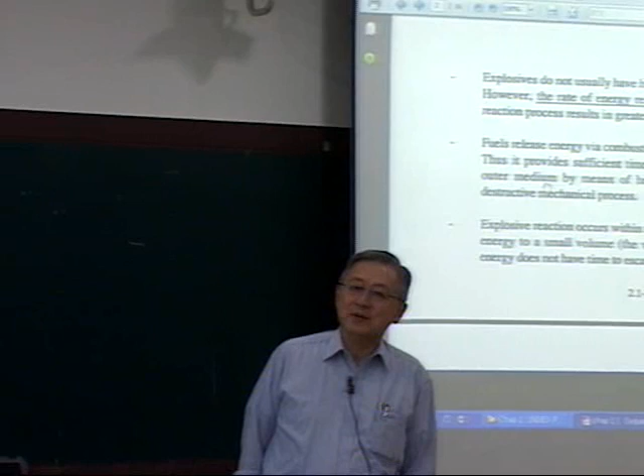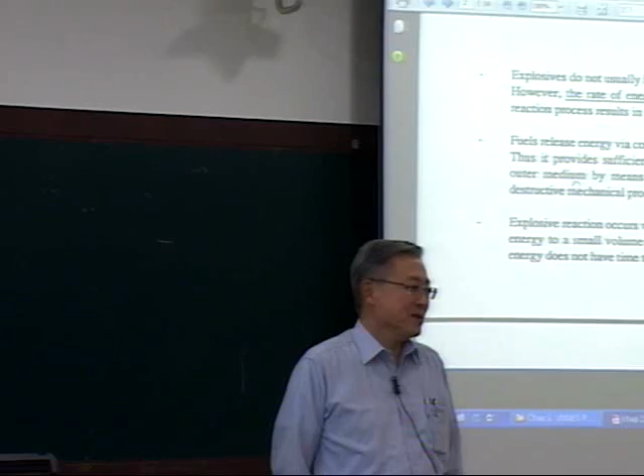Okay, so it looks like you have a great time, because it's a beautiful blue sky up there, and now really fall came in suddenly. Two weeks ago it was hot; for the last two to three months of summer it was really hot. We never experienced such a hot summer anywhere in the US or in Korea, but it was hot, right? So now everything cooled down, so it's really time for what? Time for studying hard. Then you can really have some great mileage. As you study hard and really concentrate, you will also have a great time.

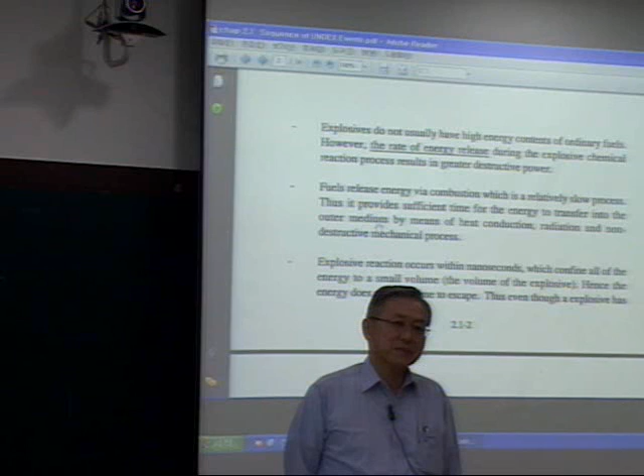And next week is of course Chuseok, and as you notice, I didn't really assign any homework, but I mentioned to you a couple of times, think about your term project. Think is most important. Think, and take time to look at yourself; what you're doing is very, very important. I always mention to my lab students, if you aren't careful, you will just keep moving and keep moving without knowing what direction you are heading, and without knowing what's out there.

That's very dangerous, okay? That doesn't mean don't go too fast, sit back, relax, watch TV. No, it's not. Once in a while, I want you to sit back and check where you are, what you're doing, and what direction you are going. That's a very good measure, okay? And not only concentrate on studying your major field, but also sit back and read other materials which you really enjoy. Just take your mind away from your major field, spend a little bit of time, then come back, okay?

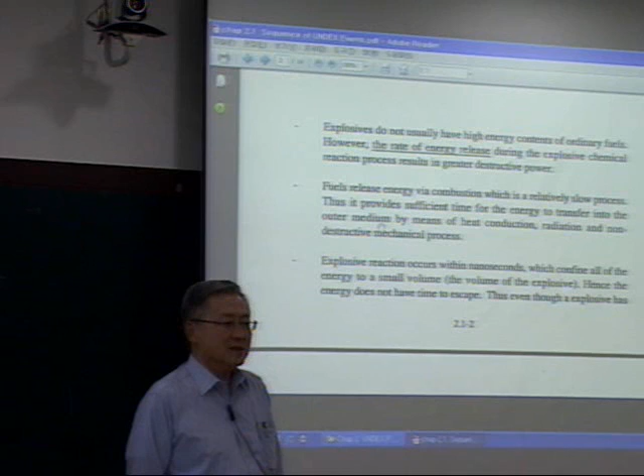So this is kind of the second week, and today I'd like to finish chapter 2.1. That's just the beginning, but through this introduction, get a feel for explosions. So that's kind of important. And Friday, as time permits, I'll check with my student, Dongman, about the U571 movie clip. Then I'll show you some real underwater explosion phenomena. With your basic, very small knowledge, you should be able to identify what the explosion in the water is, okay? So that will conclude the introduction, which is 2.1.

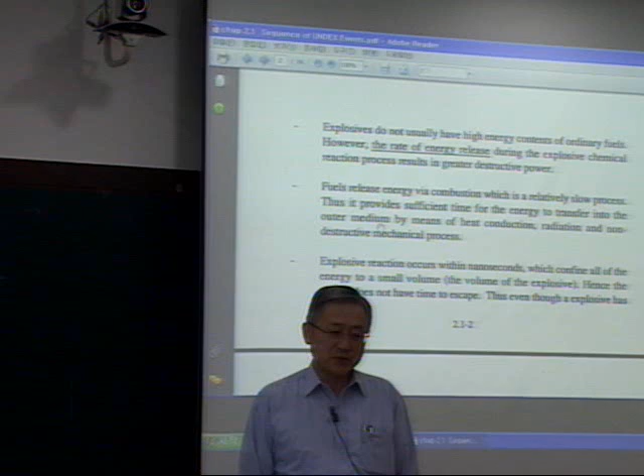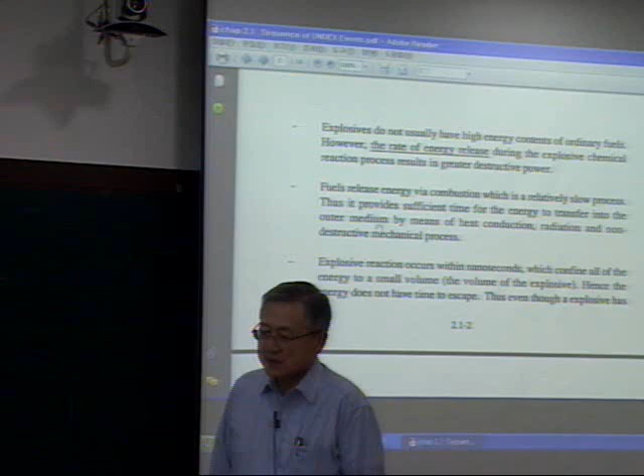Then after you come back from Chuseok, we'll do 2.2, which is conservation law, which I'm pretty sure you learned when you took something like intermediate fluid mechanics or beginning fluid dynamics, because that's the whole basis of ship shock analysis. It's hiding a little bit behind it, but with conservation law you can solve many classes of underwater shock problems. So that's what we're going to learn. That's the direction we're moving in.

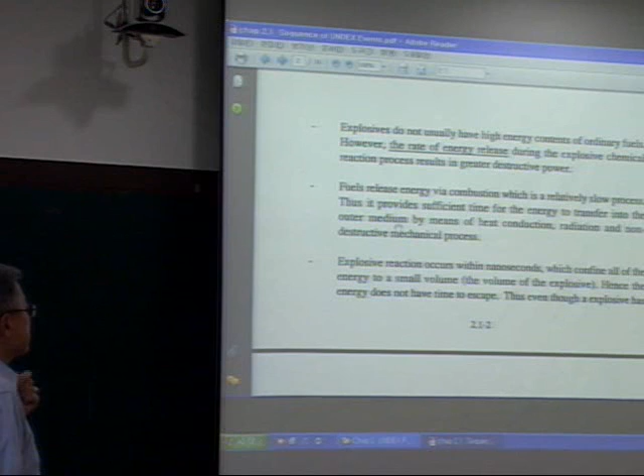So this is a continuation of Monday's talk. As you see, there are a lot of bullet items. Don't overlook them; I want you to read them. I'm going to spend a little bit of time with you today, then get your feel on it. Explosives do not usually have the high energy content of ordinary fuel. What does it mean? It says they do not have the high energy content of ordinary fuel. The explosion is rather concentrated to what? Hassan, to what? Power.

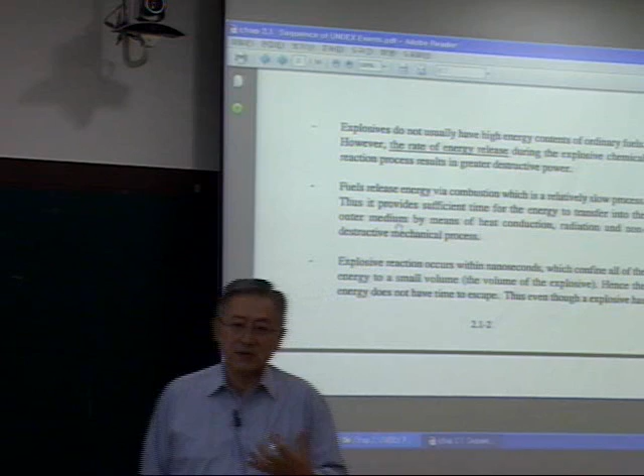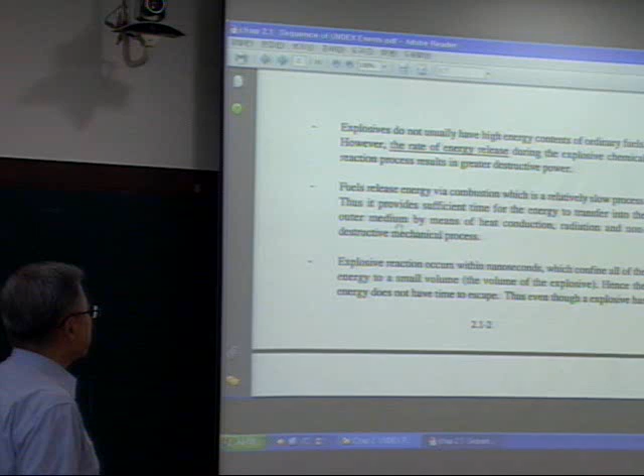So fuel itself is connected directly to energy, but explosion is connected to power itself. Power is the time rate change of energy. It says rate of energy release, time rate change of energy, right? So that's power. The explosive chemical reaction process results in great destructive power. Fuel releases energy via combustion, which is burning, a relatively slow process. The burning speed is of course a function of the pressure, but it happens below the acoustic speed, the water acoustic speed if it happens in water, the air acoustic speed if it's happening in air.

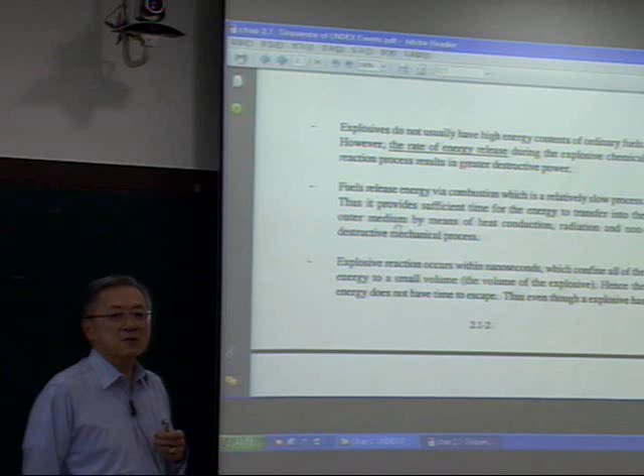What's the air acoustic speed? What's the value? 300. What's the water? 1500 meters per second. So divide by about 4.5, then you get the acoustic speed in air. So fuel releases energy via combustion, by burning, which is a relatively very slow process. It provides sufficient time for the energy to transfer into the outer medium by means of heat conduction, radiation, and non-destructive mechanical processes.

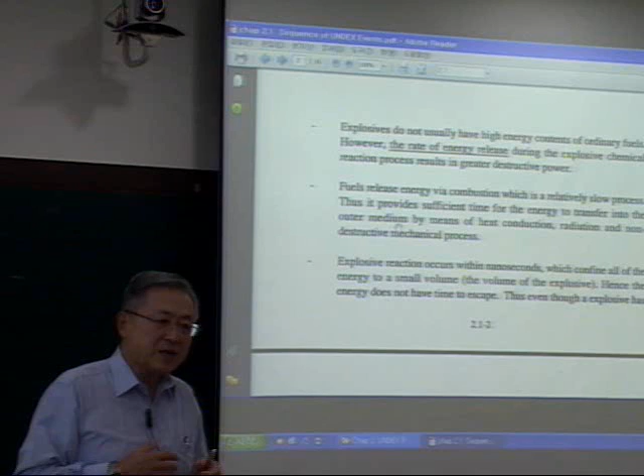However, when you confine the volume, then what happens? Then it generates more power release, like a bullet, as I mentioned. The gunpowder burns, confined in a small canister, and it just pushes the bullet out. So when you confine the volume, it generates higher power. The energy is due to the burning.

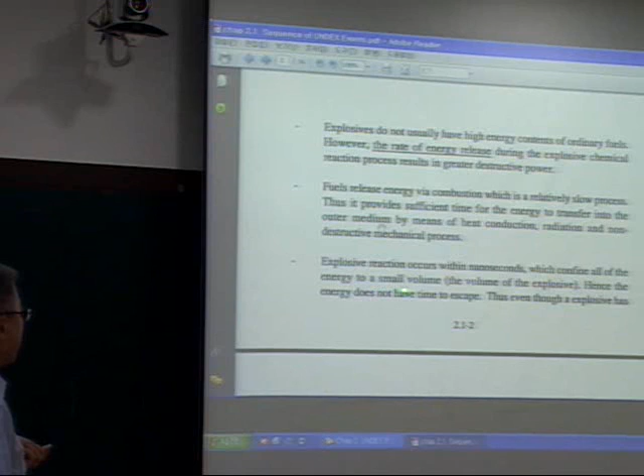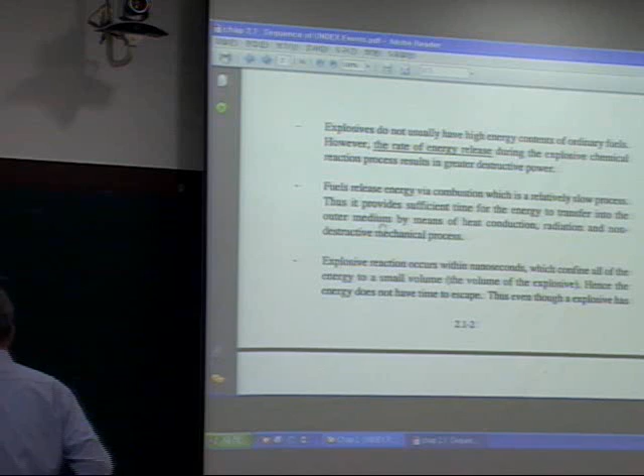For an explosive, the reaction occurs within a nanosecond, which confines all of the energy to a small volume, the volume of the explosive. Hence, the energy does not have time to escape. Thus, even though an explosive has less energy to release than the fuel, it releases it so fast that the energy contained in the given volume is extremely large. That's the reason an explosive is so destructive.

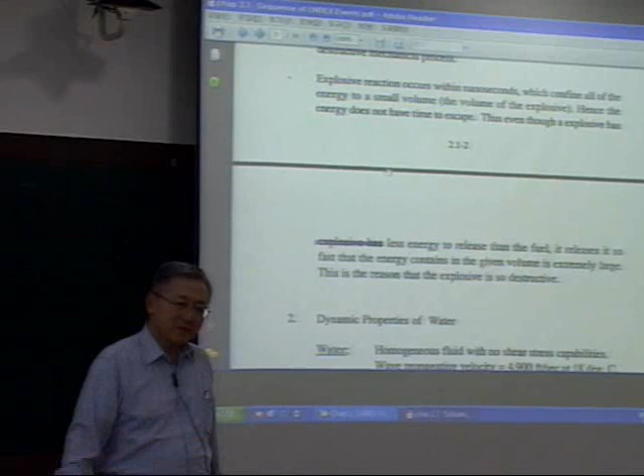When I say it happened in a nanosecond, all these kinds of talks I'm doing, when you need a judgment by looking at the data you analyzed or acquired through testing, you should develop the kind of sense to make a right decision whether the data is good or bad. Sometimes you are busy calculating a simulation, for example the explosion result, and until maybe the end of the semester you don't really have decision power whether that data is correct or not. So every little thing is built up.

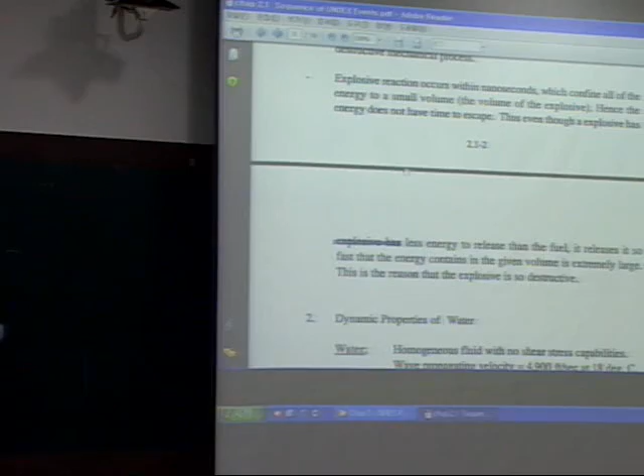So here, this is time t, and this is pressure. For example, the explosion occurs right here. Then this is a target in the water, whatever. At the time of explosion, the shock wave will propagate and hit the target. As I sit here, I feel the shock pressure coming at me and passing by. So if I draw, no longer like this, I'm going to start from here, then move up, then draw like that.

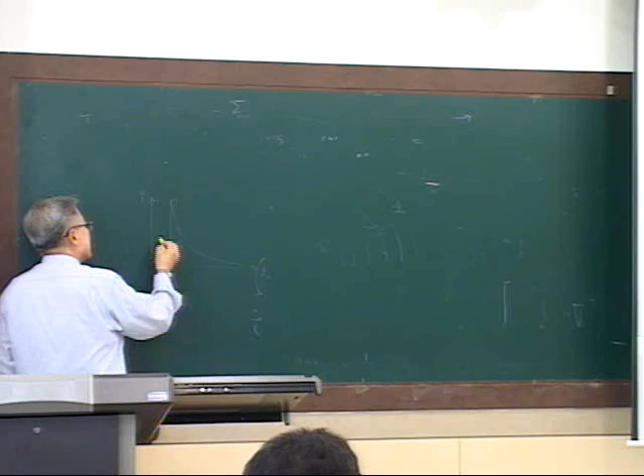So what would this pressure be? Anybody? Before I draw the pressure versus time, this is not very good chalk. Before, I drew like this, did I? Don't watch me like that. That's what I did. Then nobody asked why it starts from 0.

Now I draw the pressure profile, pressure time history, like this. My question is, what's this? This is non-zero. 0 is here. This is non-zero pressure. I said that this is the explosive, this is the target, then the water surface could be way up there. What would that pressure be? Water pressure? Water depth. So this is a pressure, let's say P naught. So P naught looks like a static pressure, right?

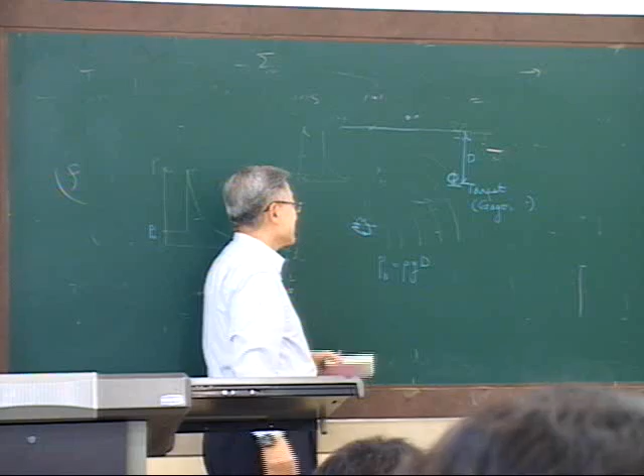This is the explosive, right? And the target is here. So gauge or target; sometimes you say gauge or target. And this is the depth D. That's our point of interest, right? So that's rho G D. And the other pressure is atmospheric pressure, 1 bar, PA. So P naught here is PH plus the atmospheric pressure. So this is what P naught is.

Everything's all calm, so quiet. When you ride a big cruise ship, it's not that quiet. But on a naval ship, I rode the aircraft carrier for a week, I rode the frigate for a week, when the ship is out on the horizon, everything's so quiet, nothing happens. That pressure is what this point will experience.

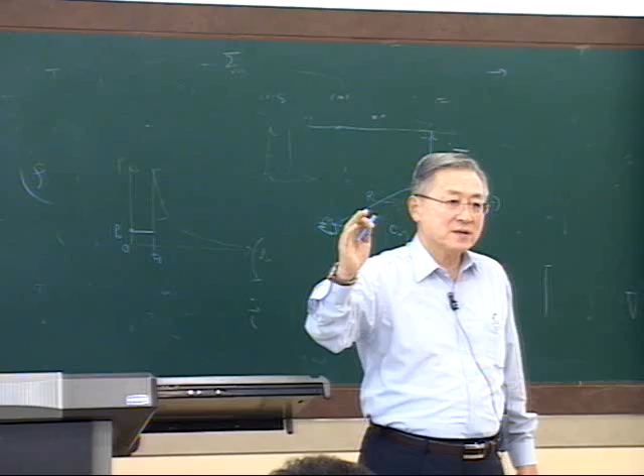Then what happens? When the explosion occurs, bang! A sudden pressure rise up there. And you can even calculate this time, let's say T1 from 0. How? If from here to here is a distance r, and the acoustic velocity in the water is C naught, then you can compute the time from the explosion, that's 0 time, as the shock wave moves and hits the target. That time, let's call T1, you can compute as we did before. T1 is equal to what?

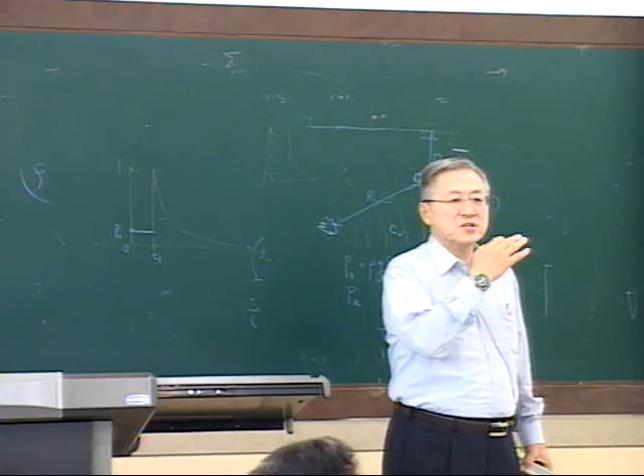R over C naught? So you can compute that, T1. Then the shock wave will move with the speed of C naught. C naught, don't confuse, nothing to confuse. You can use, in the naval ship shock analysis and design course, the acoustic velocity in the water. At the beginning, at the time of explosion, you can use a detonation speed, which is something like 8,000 meters per second, but it converges into the acoustic speed so fast.

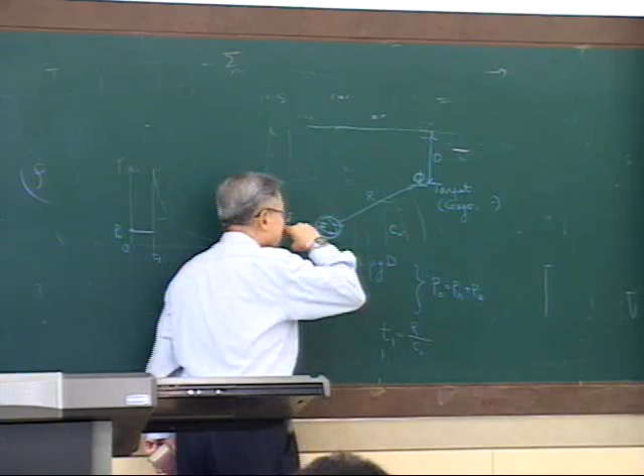So our interest is not in the vicinity of the explosive. I don't have any interest in that. The Navy doesn't have interest in that. Why? This is a ship. I repeat the same thing I told you over and over again. This is the ship, and a small explosive detonates right in the vicinity of the ship, then what happens? It will puncture the hull anyway, right?

If it's a submarine, if the depth charge explodes very next to the submarine, then what happens? It may sink the ship, may not sink the ship. The reason I'm saying is, it's all compartmentalized. It has doors everywhere, right? Sealed, water-sealed doors. When some compartments are flooded, it may not propagate through other compartments, then the loss is there, but not the whole ship, not the whole boat. So you have to pray hard.

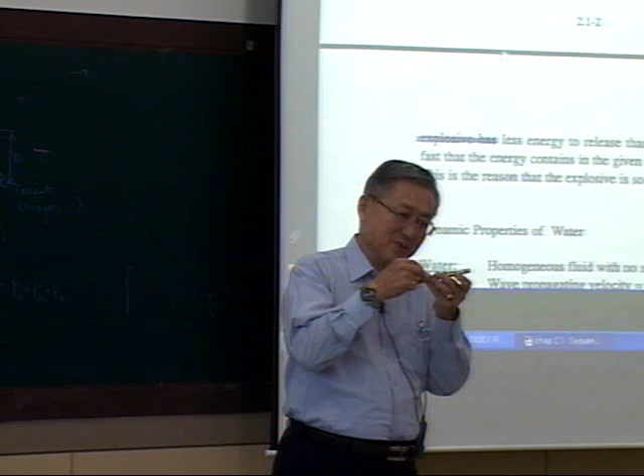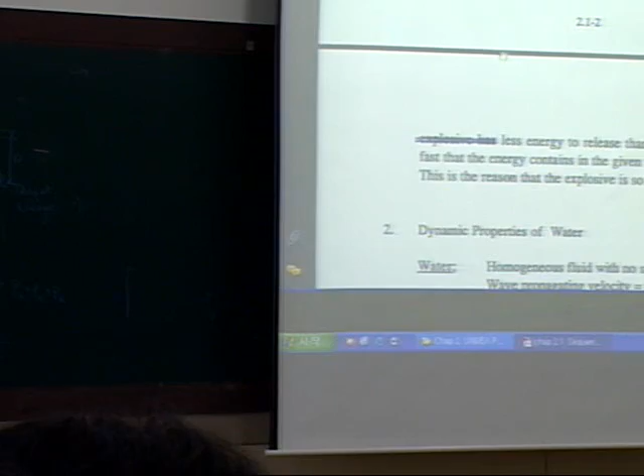An explosion occurs very next to the target. Nothing to prevent. You have to prevent having such a situation. You have to prevent. There is technology around it. So here, well, anyway, I forgot where I stopped. But anyway, so this is the duration the shock wave hits the target. Then now I almost put this really straight up. Then it's a kind of P max.

In my notes, sometimes I use P naught. You have to be careful. I'm using right here, P naught is the static pressure, okay? Then I can draw it straight up, because the explosive shock wave hits the target. Straight up is not exact. Pay attention to this. I said the whole explosion process happens in nanoseconds. When I say nanosecond, that's what I'm trying to explain. This should not be really straight up, but it's a very, very good approximation. If I draw it in a little bit more correct sense, I would rather say this is straight up, a little bit offset. Exaggerated a little bit, okay?

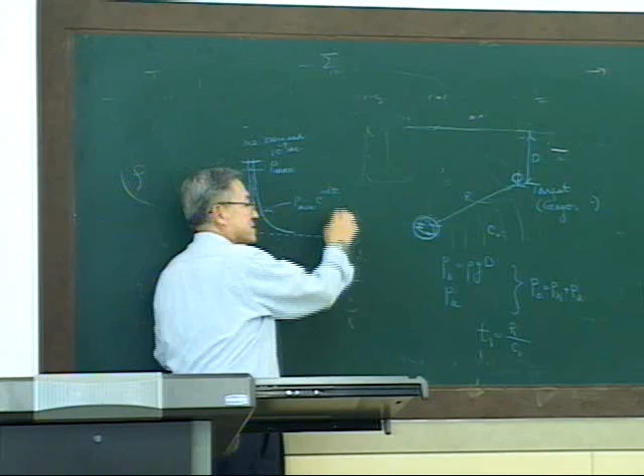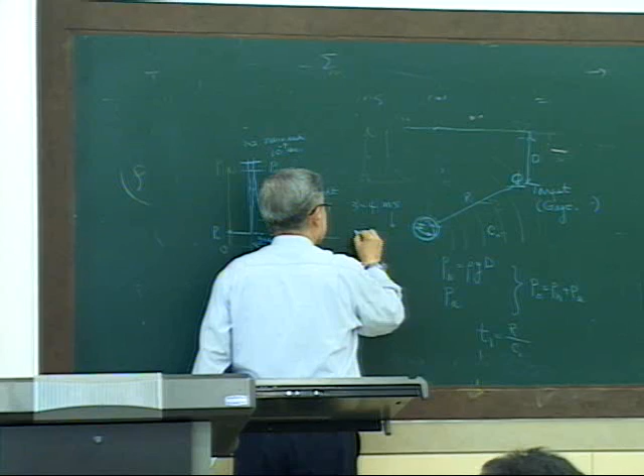Exponential decay means this is P max times e to the minus alpha t. This alpha is some factor, which I'm going to tell you about a little bit later. So it's exponential decay, then it just converges to P naught. This whole process, I could say, is about 3 to 4 milliseconds. A millisecond is 10 to the minus 3, right? So 3 to 4 milliseconds means 3 to 4 multiplied by 10 to the minus 3 seconds. Very, very fast.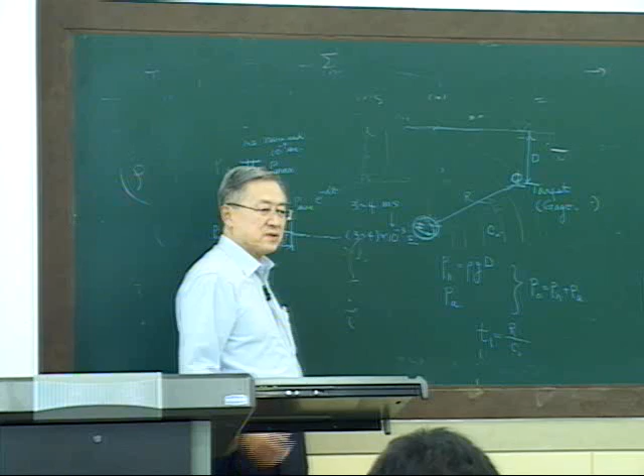In other words, for the explosion, everything is done within 3 or 4 milliseconds. In the Cheonan incident, everything was done in less than around 1 second. Done. So fast. You can't stop it, so fast. So I'm just talking about shock wave propagation. I haven't talked about the gas bubble oscillation. These two items are most important. And some people who claim to be experts in explosions, some, not all, their thought and understanding is not clear. So you have to really, I just mentioned the shock wave propagation here.

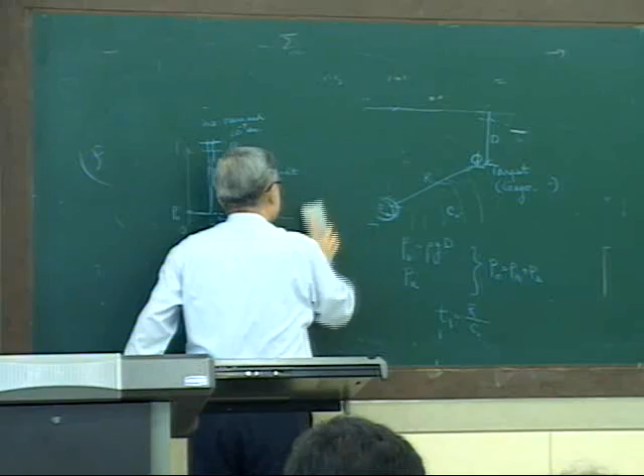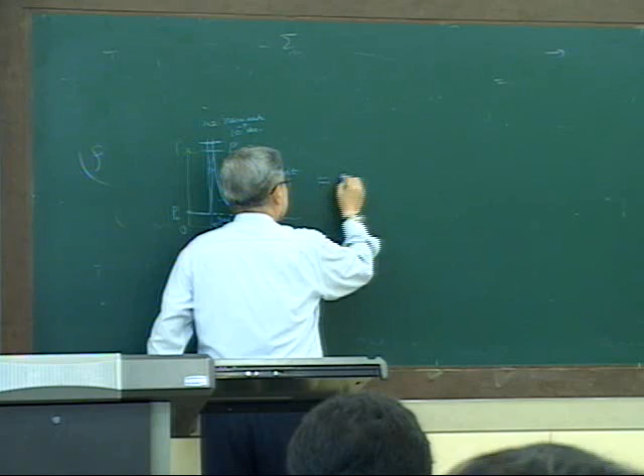And one more. So you have this understanding. Sometimes when you read papers and all that, you're dealing with nanosecond duration. Sometimes you look at millisecond duration. That's the time we are dealing with. And this phenomenon is a combination of two. This is P naught. This is the total P. This is the static pressure.

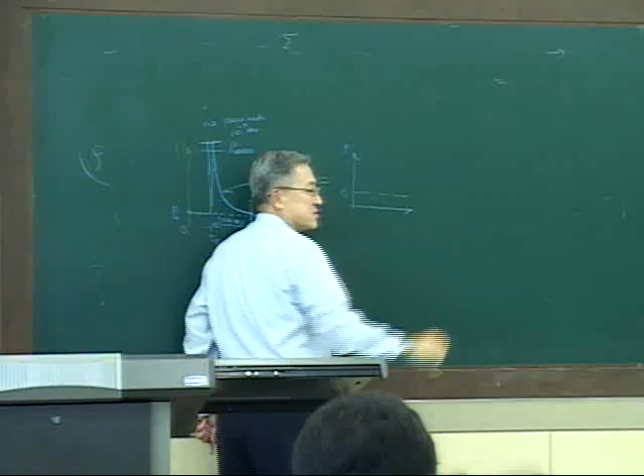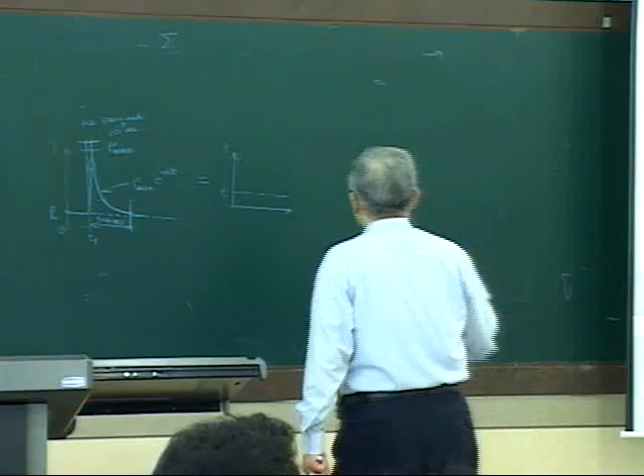You have a structural system, a mechanical system. If it is subjected to the static pressure, then you can compute all the static response, right? Your interest is the dynamic response, right? And for the ship shock situation, you are mostly dealing with a linear system. Linear elastic analysis is what you would involve. And when damage occurs, a permanent set occurs due to the shock wave or explosion, then you are dealing with a nonlinear system. But mostly in ship shock trials, you are dealing with a linear analysis system. You can combine this with this.

It's a combination of two, right? So you can separate static analysis. You know how to handle that. Dynamics you don't know yet; that's what you want to learn. So this P here, this P, is absolute pressure. Total pressure or absolute pressure. Okay, this is absolute pressure.

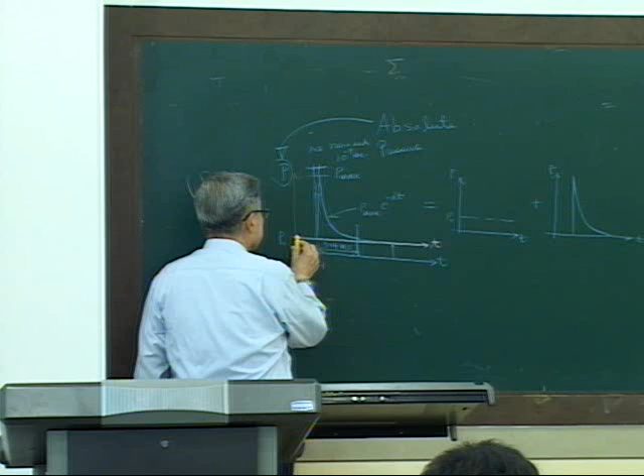But here, if I draw here, over here, this is a 0 here, right? Listen carefully. So this is one way, okay? But here, I'm going to shift my axis from here to here. I'm going to move this axis to here, so I can draw this axis now. This is T. I can do that, right? And also, I can shift this vertical axis to here. Then I can draw this.

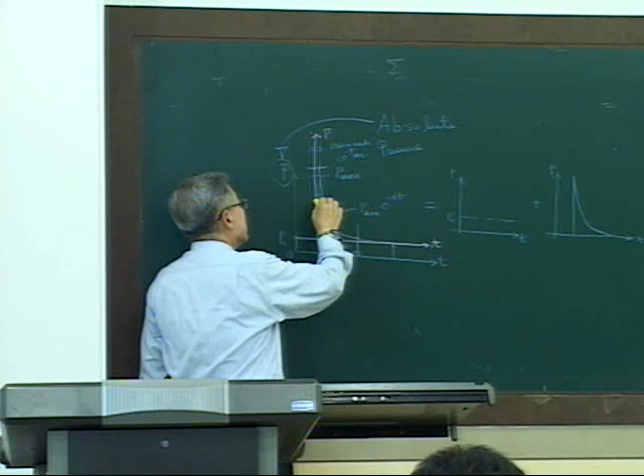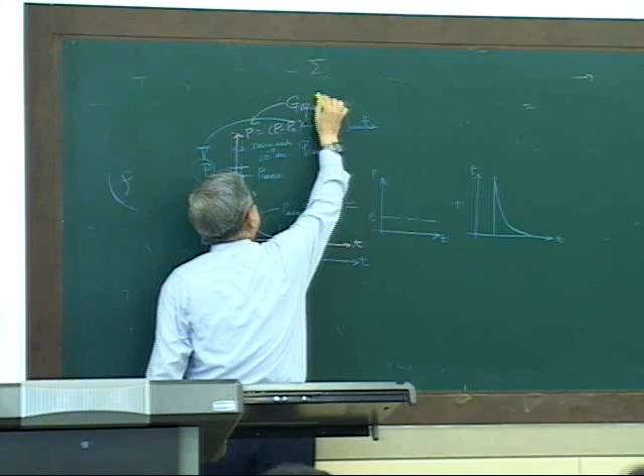Rather than handling this and this, I can just get down to T and P right there. And if you do that, what would be the pressure? This P is really total P minus P naught, right? Because the static pressure is out, just deleted. I have no interest because I can handle that separately. This is called the gauge pressure. This P is gauge pressure. I'll say this again a couple more times, okay? That's gauge pressure.

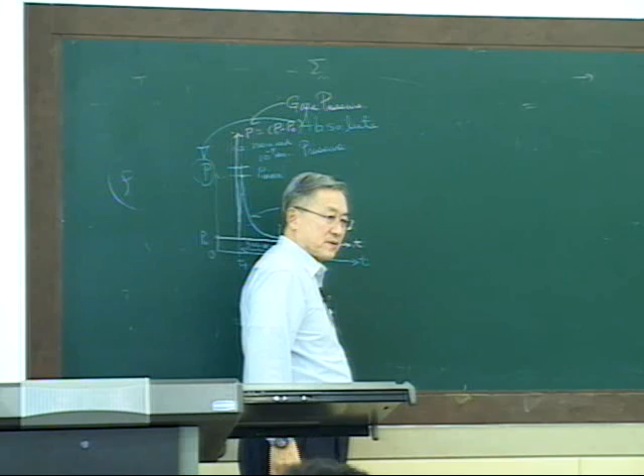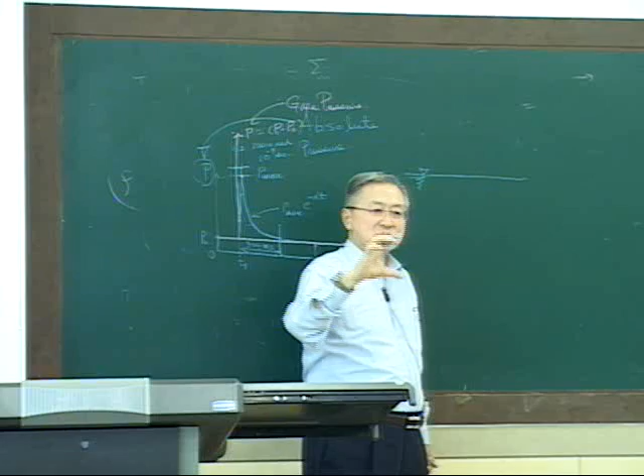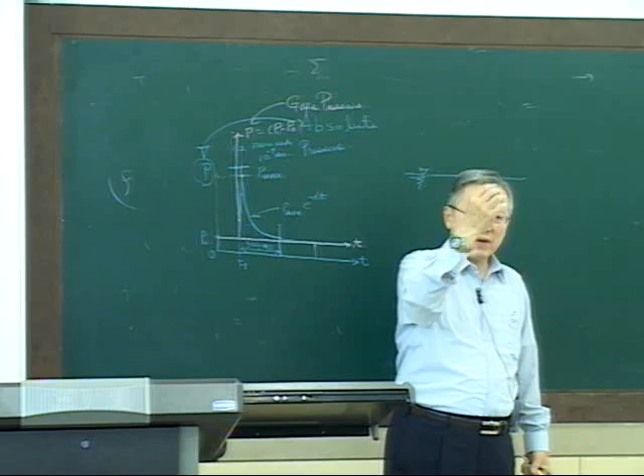What does it mean? What's the use of it, the gauge pressure? In the explosion experiment, I have a free field. Let's say the pressure gauge I mentioned to you is about that high, about 6 centimeters, very flimsy. I don't have a sample here, but it's flimsy, and it measures the pressure when the shock wave hits it.

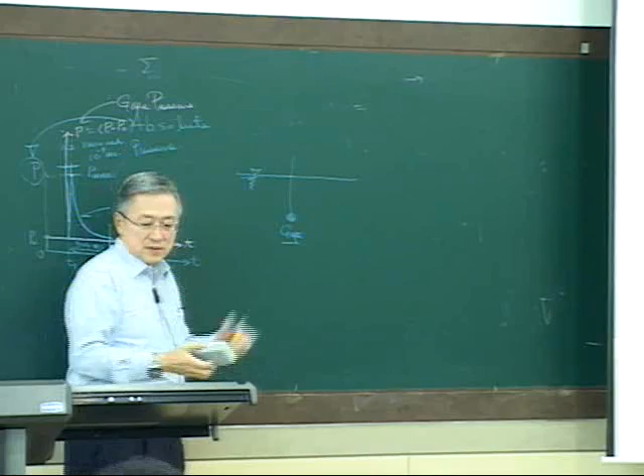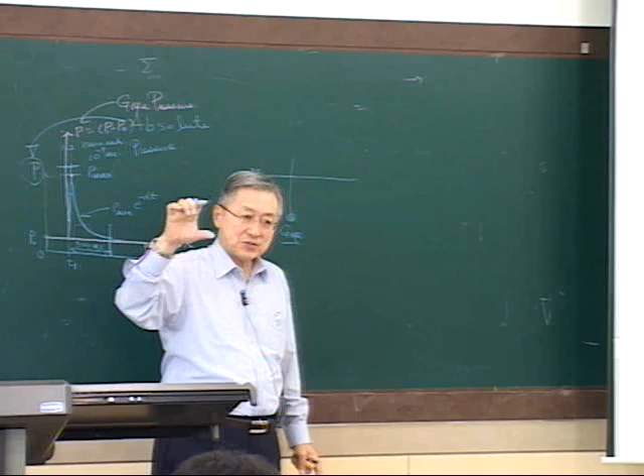This is what I'm going to do hopefully toward the end of next week. This is a gauge. I'm going to say simply this is the gauge, hooked up to the instrument. Then as it goes deeper, it will register in the measurement instrument. As it goes down, it records the depth, which is related to the pressure, rho g D, right? So let's say this is the depth, D.

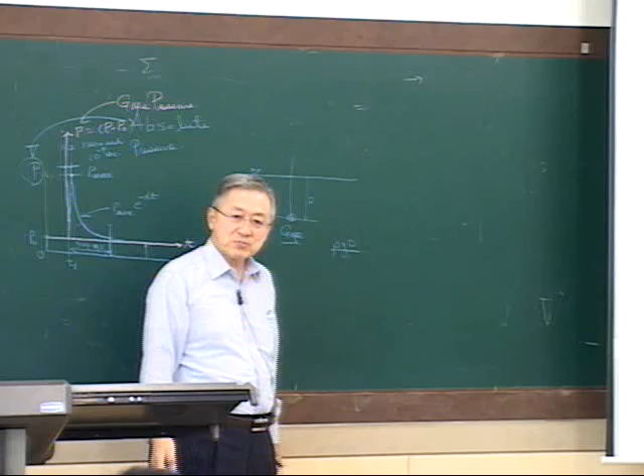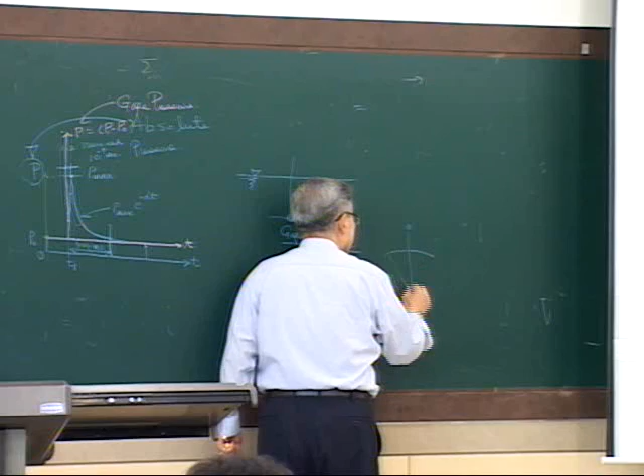Initially it registers something like rho g D, the pressure in the gauge. That's the static pressure. So to measure the dynamic pressure at the time of explosion, I don't need this. We know it. So I reset the gauge to 0. At the beginning, the needle is showing right there. Then I reset the gauge back to 0 at this depth. Then I conduct the testing. Whatever it registers during testing is what? Dynamic pressure, right?

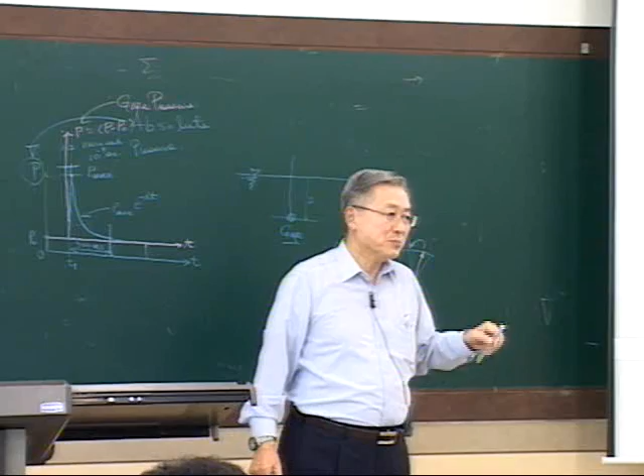Dynamic pressure, because from the total pressure I delete rho g D. So the pressure the gauge picks up is dynamic pressure. This is exactly what this curve means. Just remove the static pressure. Also I shifted the time axis and vertical axis down to here. This is all introduction, so I put everything here, but the rest of chapters 2 and 3 sort out everything.

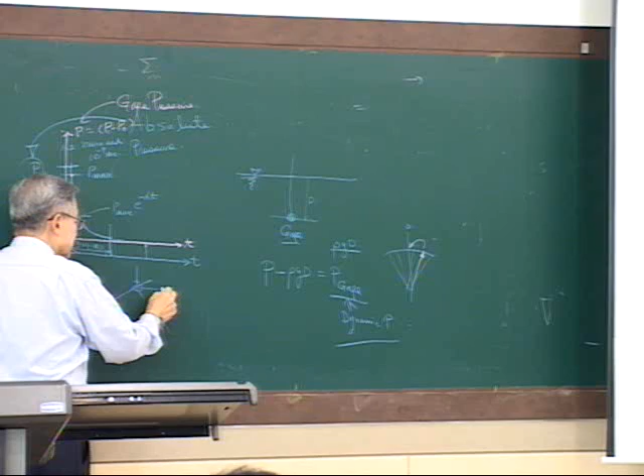So here you have an explosive, and you have a target right there. The shock wave hits it, and it takes time T1, okay? I don't have to set the inertial frame there. We know what happens here: the shock wave just propagates. So I'm going to set the frame saying that when the explosion occurs, that's time 0, rather than T1. Equation-wise, whether it makes sense or not, I'll tell you.

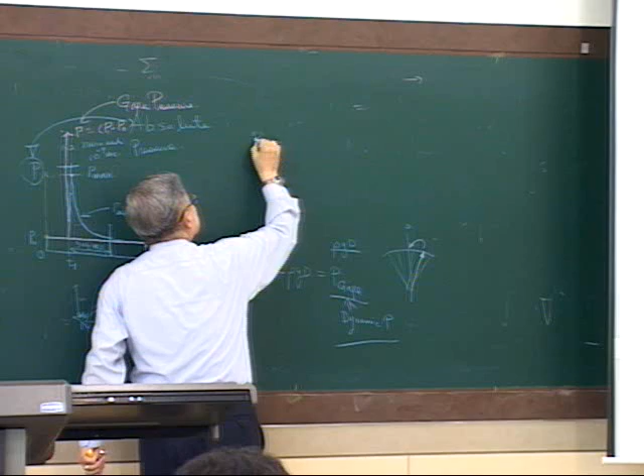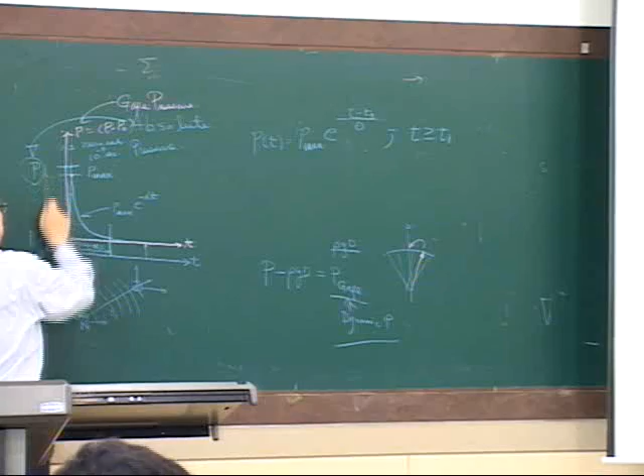Usually P(t) equals P max times e to the minus (t minus T1) over theta. I'll just say that without going deep. Theta is some constant, called the decay constant. Then this is time T1, so t must be at least T1. If t is below T1, the shock wave is somewhere here and hasn't reached the target yet. So reference time t equal to 0 is when the explosive detonates. In this frame, t has to be greater than T1.

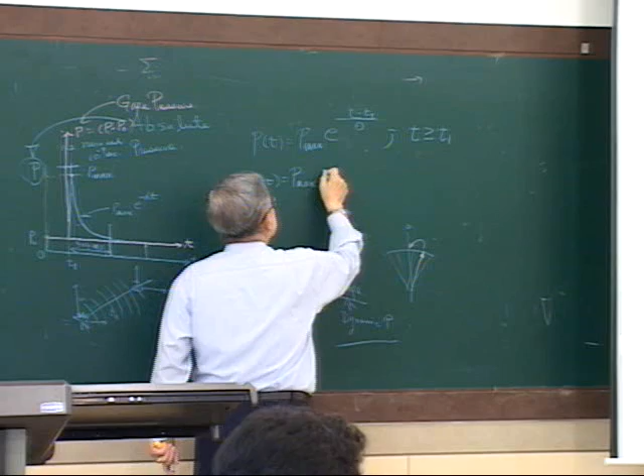Otherwise nothing happens. But now, shifting into the pink frame, I can say P(t) equals P max, which doesn't change, times e to the minus t over theta. Here t has to be greater than or equal to 0. So you start counting from here. Got it?

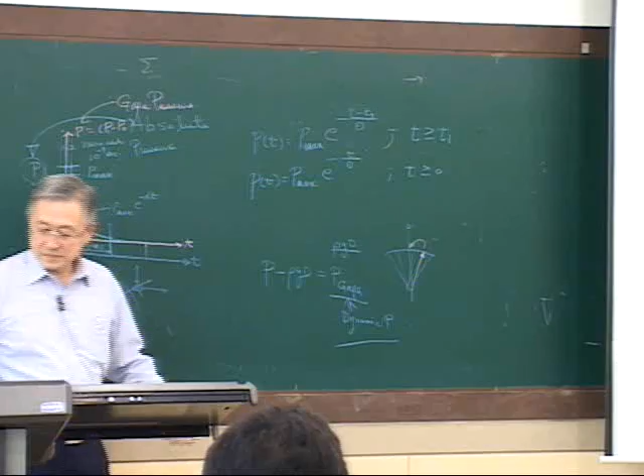Just to put everything together, sometimes it works, but eventually everything should work.

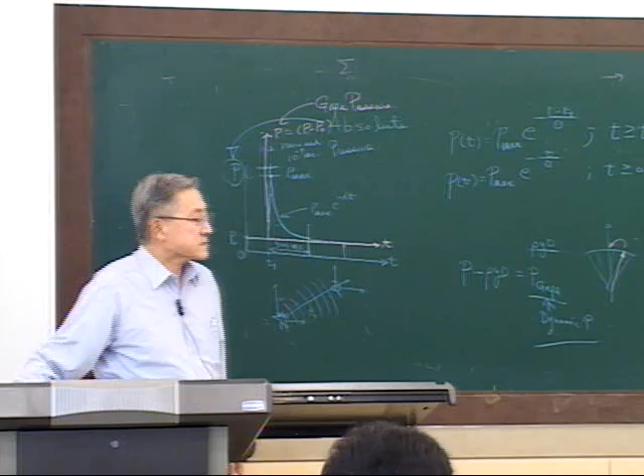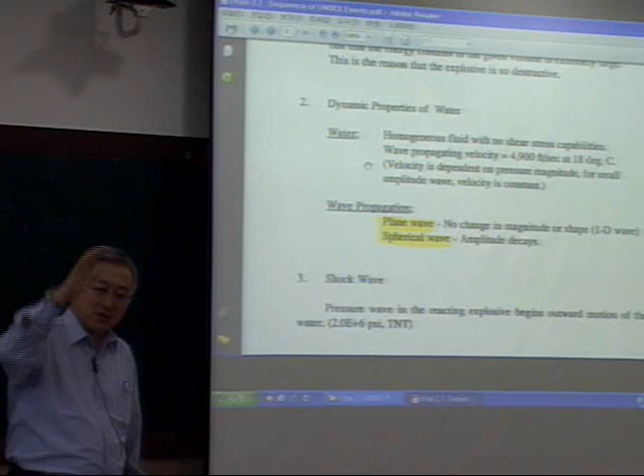For the water, the dynamic property of water, we're going to treat it as a homogeneous fluid with no shear stress capabilities. When you're dealing with the whole ocean environment, at 10,000 meters, it's not homogeneous. It has layers of water with different characteristics. But we're dealing with water in the range of depth where ships and submarines operate, and for that depth you don't have to worry about changes in acoustic velocity in the water. It's all homogeneous, so you don't have to worry about layers of water.

So it's homogeneous, and you can assume the wave propagation speed, the acoustic speed in the water, is about 4,900 feet per second at 18 degrees Celsius. That's really the most common temperature we deal with, 18 to 20 degrees is the best. Of course velocity depends on pressure magnitude, but you don't have to worry about the function of acoustic speed in water as a function of pressure.

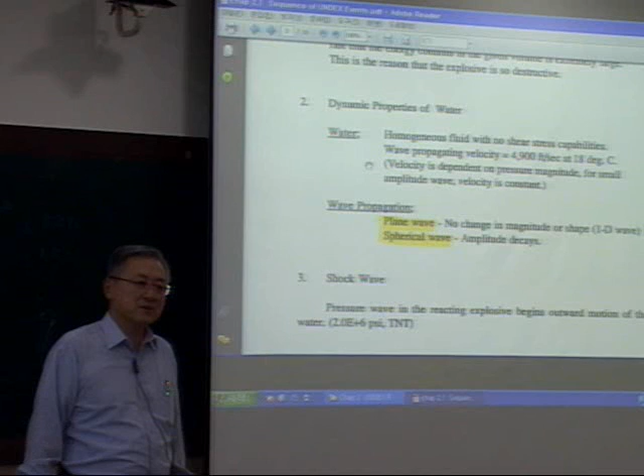Of course, temperature you do have to worry about. Like Arctic water, South Pole, North Pole - even during summer, the Indian Ocean would be something like 90 degrees Fahrenheit. What would 90 degrees Fahrenheit be in Celsius? Using the formula, 5/9 times F minus 32, that gives about 30-some degrees, 35, 36 degrees. But the Arctic Ocean is way below that compared to India.

So temperature dependency is there. What do you think - as the temperature rises, does acoustic speed rise, yes or no? Yes. Temperature rises, acoustic speed rises.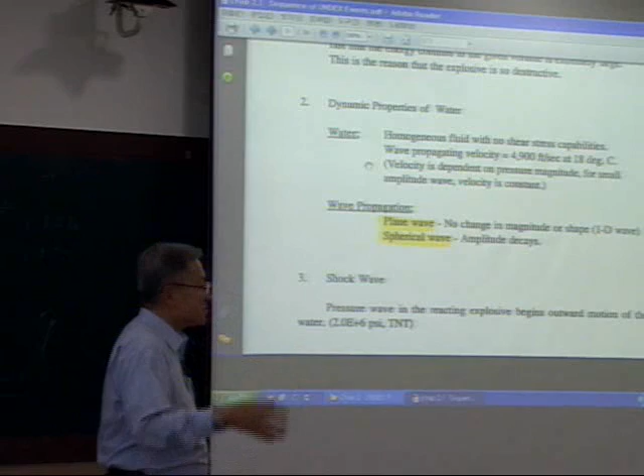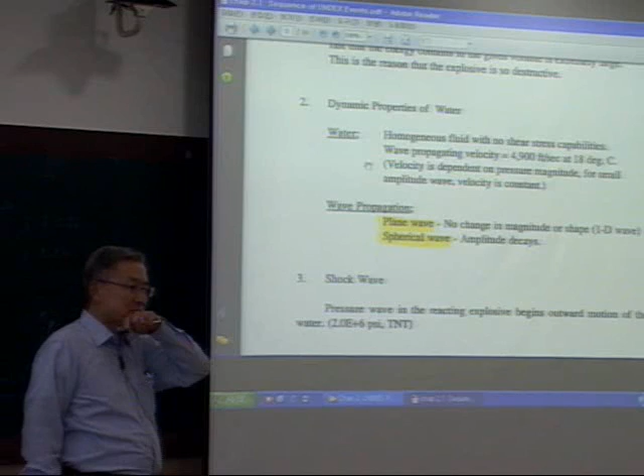All the equations are in chapter 3, which you haven't gotten to yet, but you will. So we're going to deal with two different types of wave propagation: one is a spherical wave, the other is a plane wave.

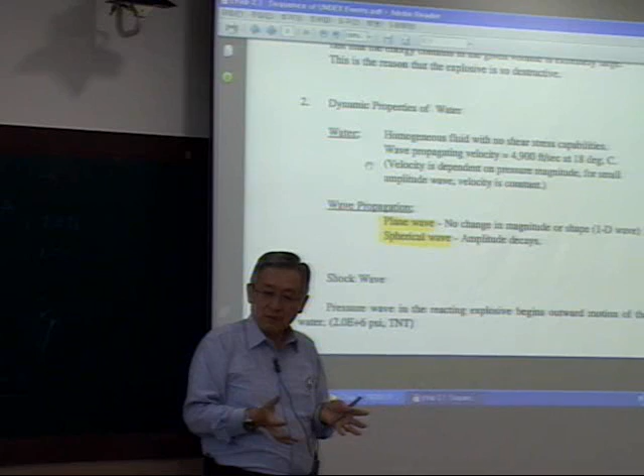At the time of detonation of a spherical charge, the shock wave will grow, and the shock wave front is a sphere shape. As it grows, total energy is constant, so as the surface grows, the energy per unit area of the shock wave front gets smaller - it's proportional to 1 over r, where r is the distance between the charge and the target. So as it grows, the pressure naturally comes down.

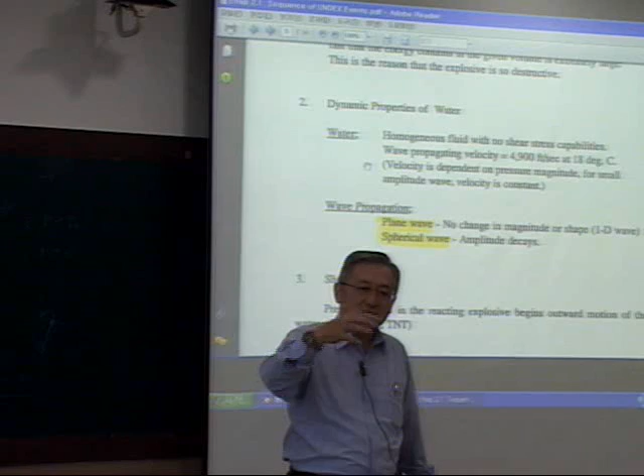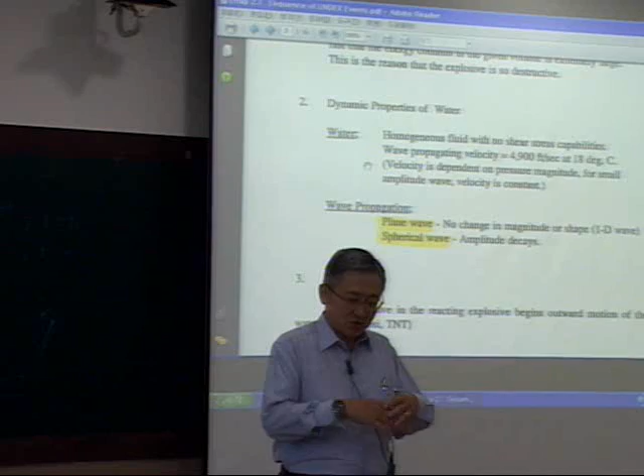But as it really grows, for big charges, the curvature of the shock wave front approaches flat. It's so big that small changes in pressure aren't noticeable, almost like a flat nuclear explosion - really flat. If it were truly spherical, a shock wave front would kill everything away, there'd be nothing to save, so you'd have to be miles and miles away to survive. That situation is a plane wave - you don't have to think about the change in shock wave front pressure. So with a plane wave, there's no change in magnitude or shape, it's 1D.

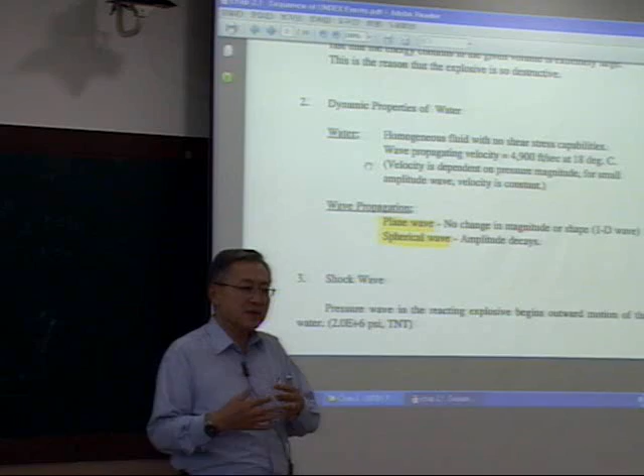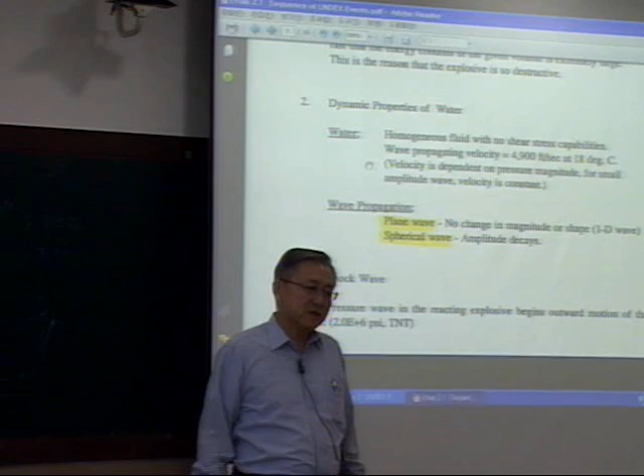For conventional explosion situations, all you can think of is the charge source being really far away. If it's really far away for a conventional explosion, the pressure is very small, you may not need to consider it. So theoretically there's plane wave and spherical wave, but you can also make a plane wave artificially by setting a line charge and letting it detonate simultaneously - then the shock wave is a plane wave.

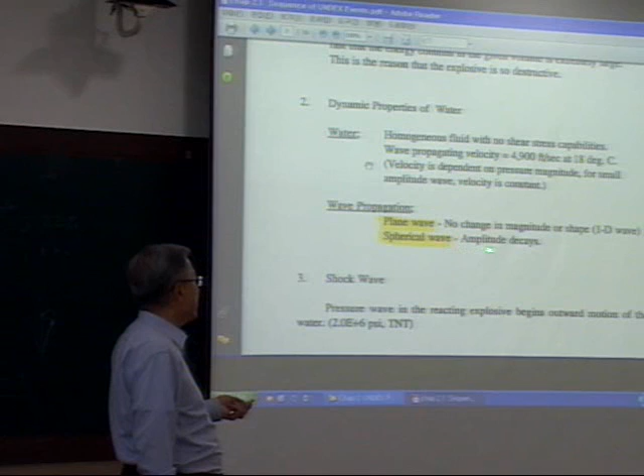For a spherical wave, the amplitude decays - the pressure amplitude decays. And the pressure wave in the reacting explosive begins outward motion of the water, of course. Duration of the shock wave is on the order of a millisecond - the whole thing goes about 3 to 4 milliseconds, and then everything's done with the shock wave.

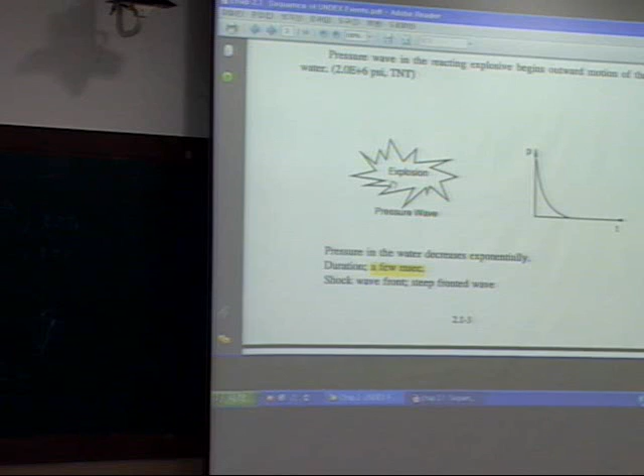When you get into bubble motion, it's really different from the shock wave. The shock wave is gone, then the bubble oscillates - bubble oscillation duration is 1 to 2 seconds. That's what you have to worry about, but the shock wave deals with 3 to 4 milliseconds.

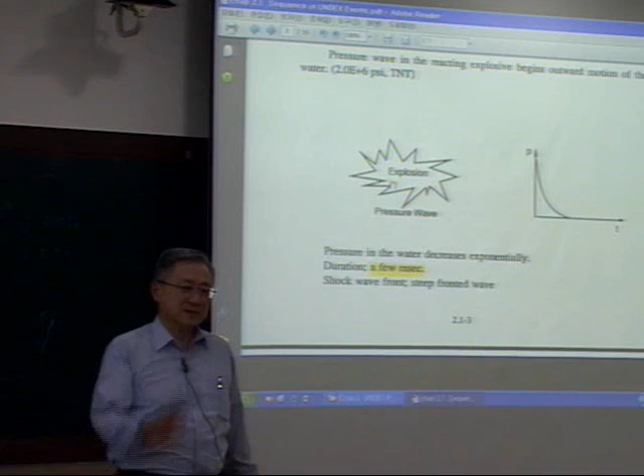And explosion pressure changes on the order of nanoseconds, a slight change of the pressure. I think I'm going to stop right here. The shock wave front is very steep, it's discontinuous - you can say it's a straight-up steep shock wave.

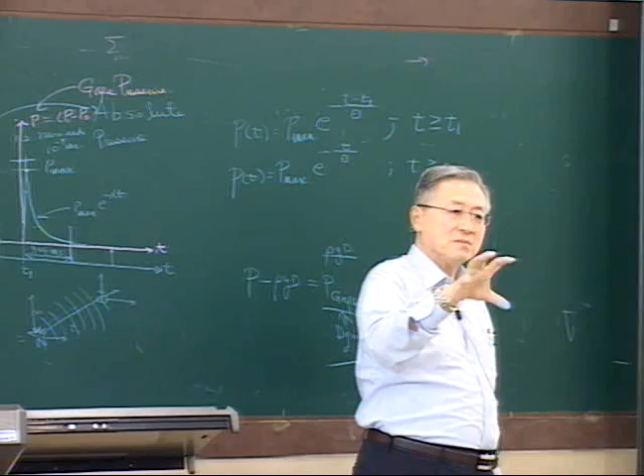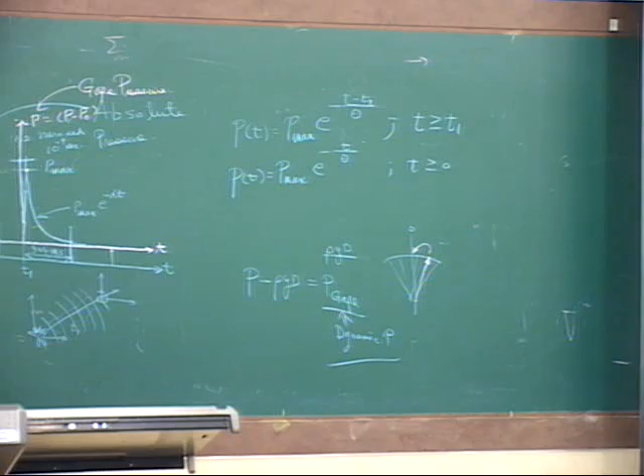On Friday I'm going to talk more about getting into the bubble. That's all you have - when you say excitation mechanism, the basic types are: one is the shock wave, the incident shock wave; another is bubble motion, the secondary shock wave caused by the gas bubble. That's what my lab students are all working on - gas bubble and shock wave, all that. So we'll continue on Friday and complete chapter 2.1.